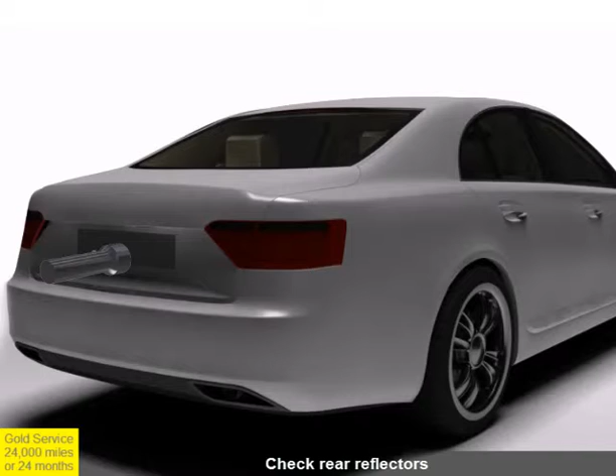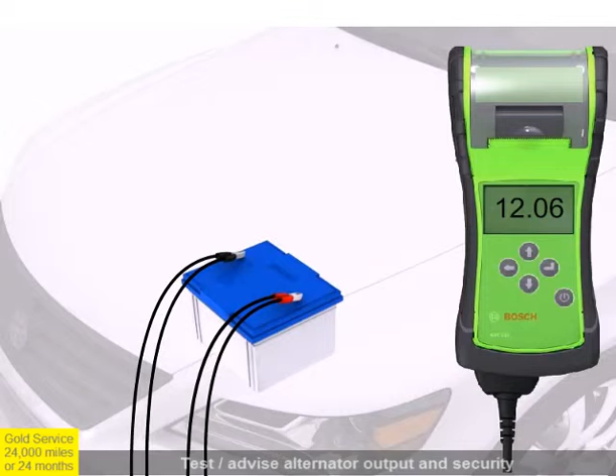Exterior lights, headlight alignment, reflectors, warning lamps, dash and heater control lights are all checked for correct operation. The battery condition and connections are checked to ensure consistent starting, and the security and output of the alternator are tested. The door and bonnet latches are checked, and locks and hinges are lubricated.

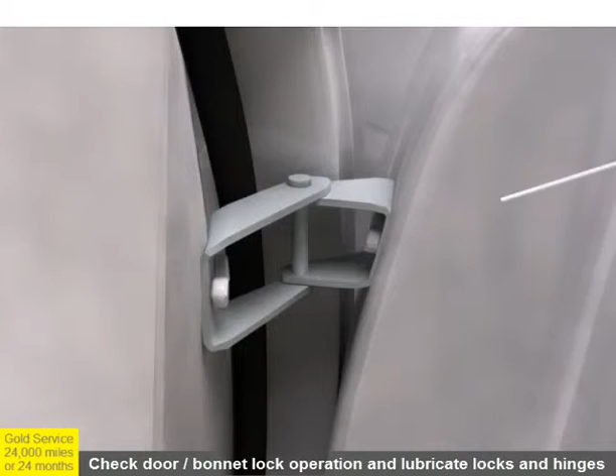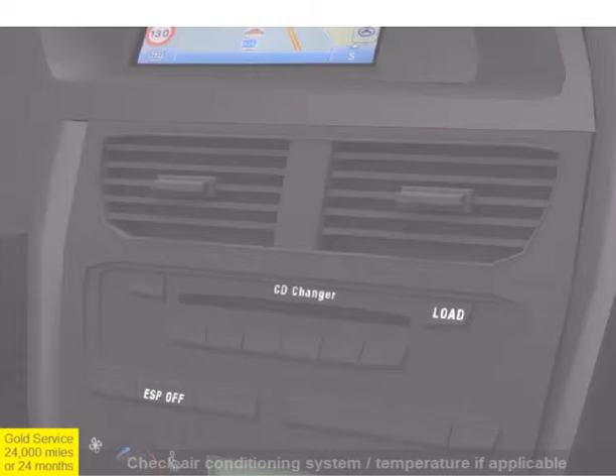Wipers are checked to make sure the screen is kept streak-free and the screen wash is refilled. Where the vehicle is fitted with a pollen filter, the filter is inspected to ensure clear airflow, and aircon is checked for cooling efficiency. The engine oil is drained and refilled with new oil according to manufacturer specifications.

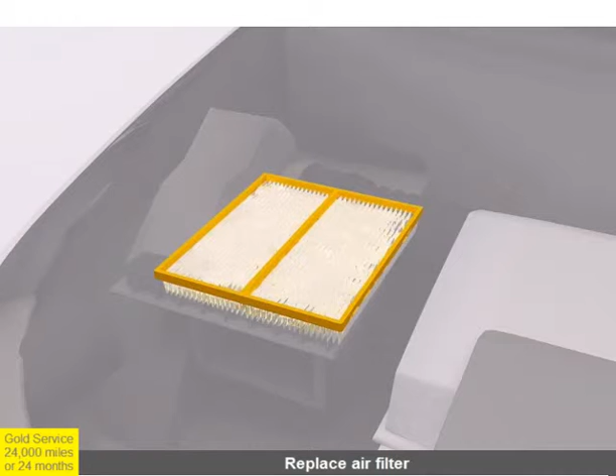The oil filter is replaced, and the engine is visually checked for oil leaks. The engine air filter is replaced. The engine coolant level is checked, and the condition and strength of the antifreeze is measured. Engine coolant is added to the system if required, and the cooling system is visually inspected for leaks.

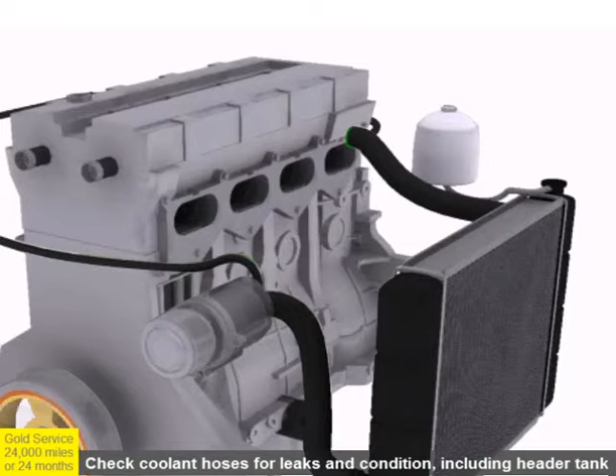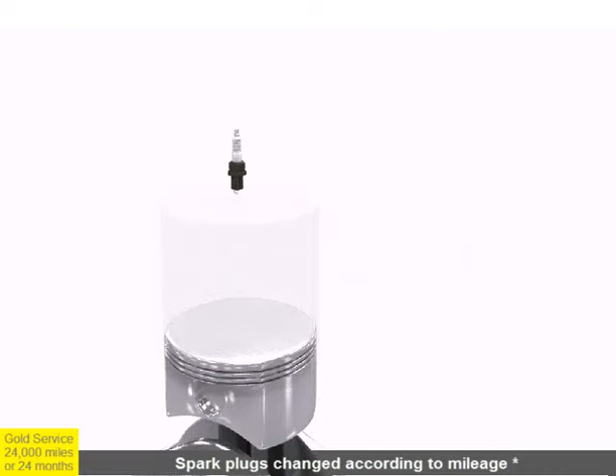The condition and tension of accessory drive belts, such as the alternator belt, is checked, and the spark plugs are replaced if required based on the vehicle mileage. On vehicles with adjustable valves, the clearance between the cam lobes and the valves is measured and adjusted as required.

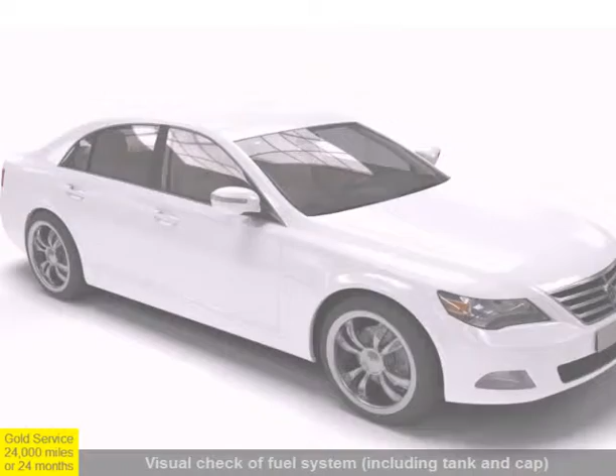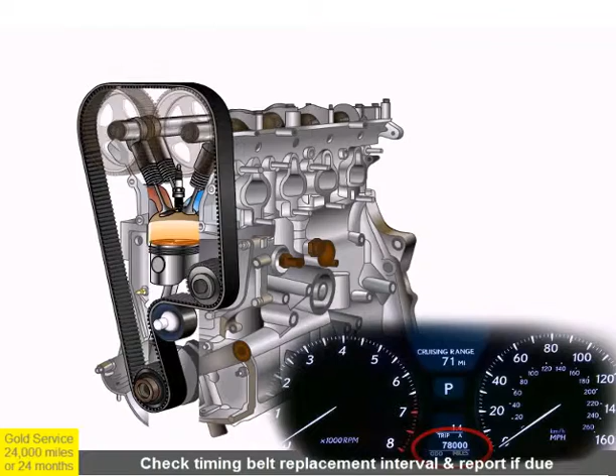The fuel system, including the tank and fuel cap, are inspected, and where an external fuel filter is fitted, the filter is replaced. On vehicles with a timing belt, the manufacturer's replacement interval is checked, and replacement is recommended if required. Next, we move on to the brake system.

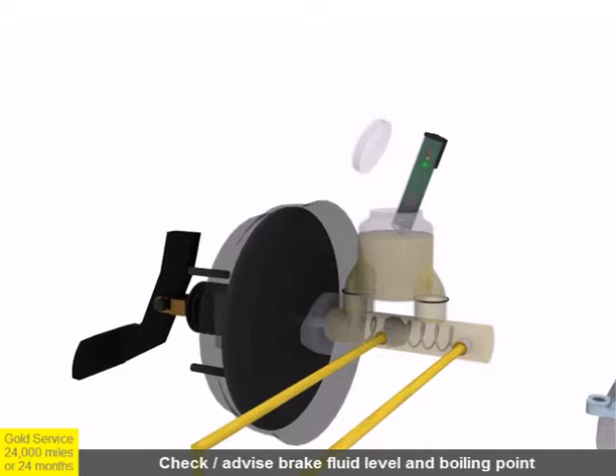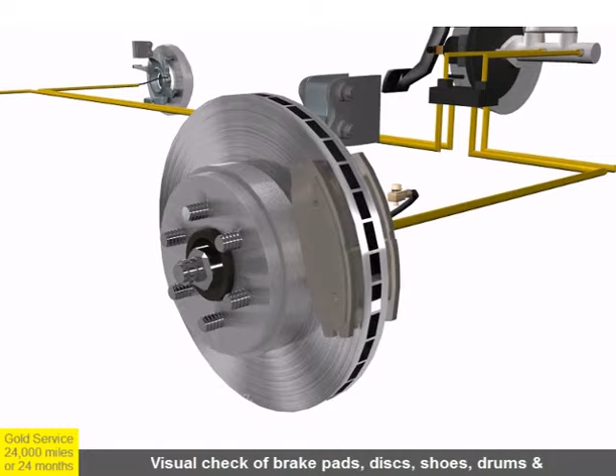The operation of the brake servo is checked, along with the condition and boiling point of the brake fluid. The recommended brake fluid is added to the reservoir if required. Brake calipers, pads, discs, wheel cylinders, shoes, and drums are inspected for wear or damage, and brake hoses and brake

lines are checked for corrosion or wear. The operation of the handbrake and security of linkages are checked, and adjustments to the handbrake are made when necessary.

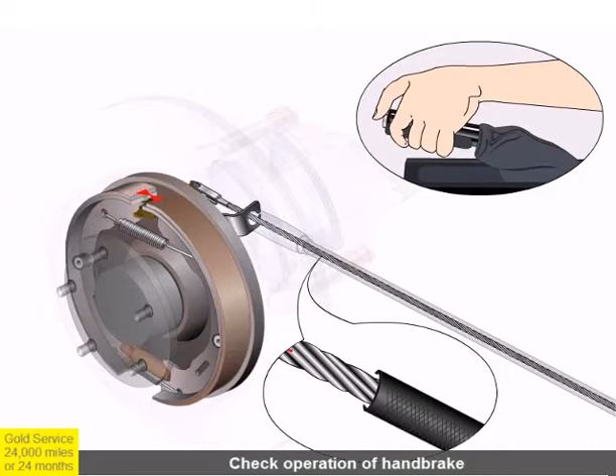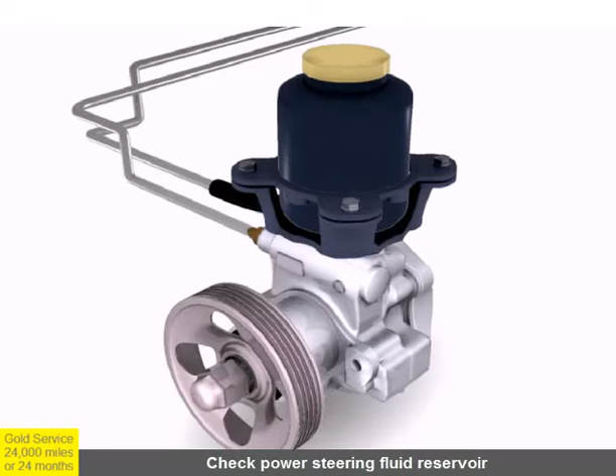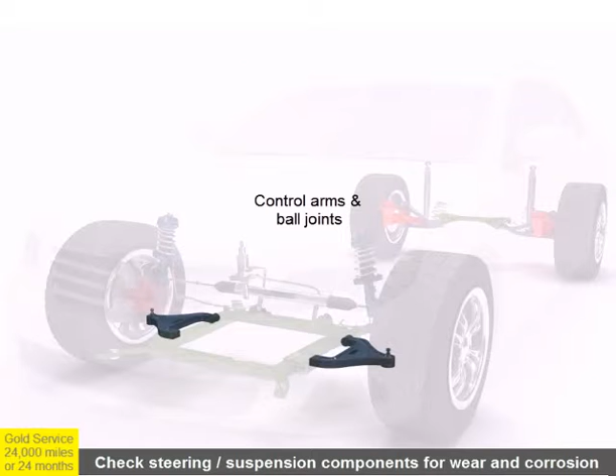Areas checked in the steering and suspension system include road springs, the condition and level of the power steering fluid, and all major steering and suspension components, including suspension struts and shock absorbers, control arms and ball joints, the steering rack, track rods and linkages, anti-roll bars, and anti-roll bar links.

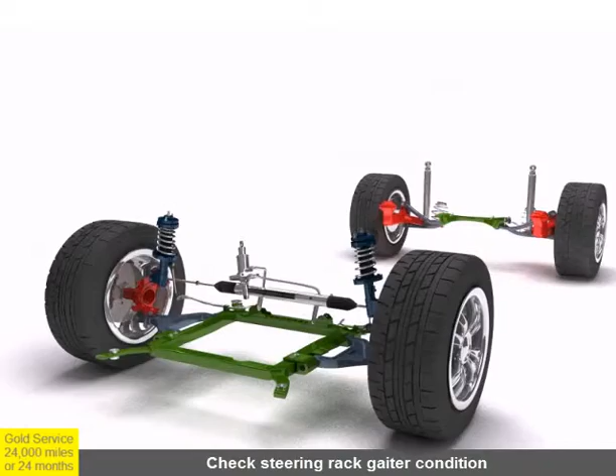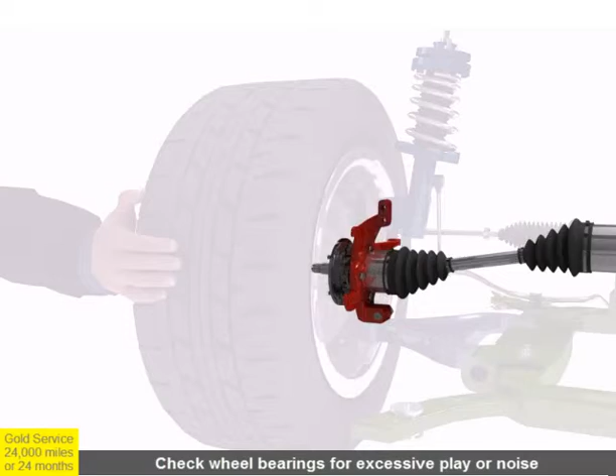The gaiters on the steering rack are inspected for tears or cracking, and the shock absorbers are inspected for leaks or damaged mountings. Wheel bearings are inspected for looseness or excessive free play and road noise.

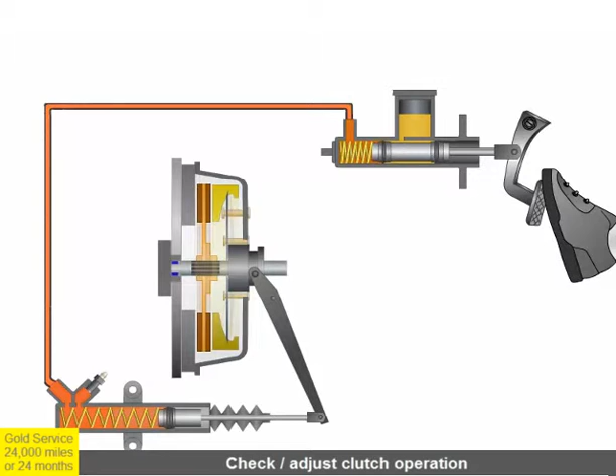The rubber gaiters on the driveshaft joints are checked for cracks or tears that could allow their lubricating grease to escape. The fluid level inside the gearbox and differentials is checked, along with the operation of the clutch on manual vehicles. The transmission or gearbox is also inspected for fluid leaks.

The exhaust is checked for leaks, and to ensure that mountings are secure, the condition and tread depth of all tires is measured, and tire pressures are checked and adjusted as required. Wheel nut torque is adjusted to match manufacturer's specification.

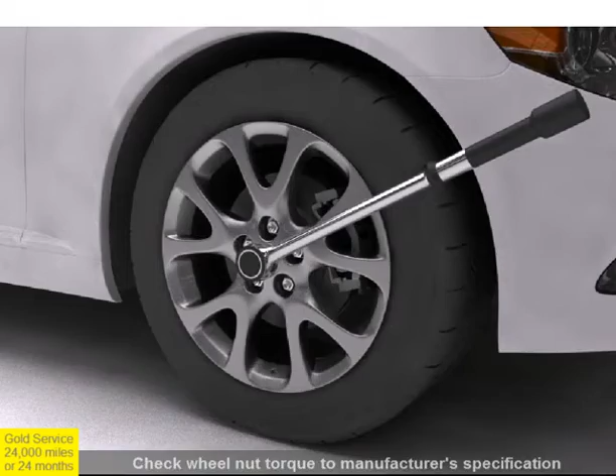Finally, a scan of the engine management system is performed, the service reminder light is reset where fitted, and the service book is stamped.